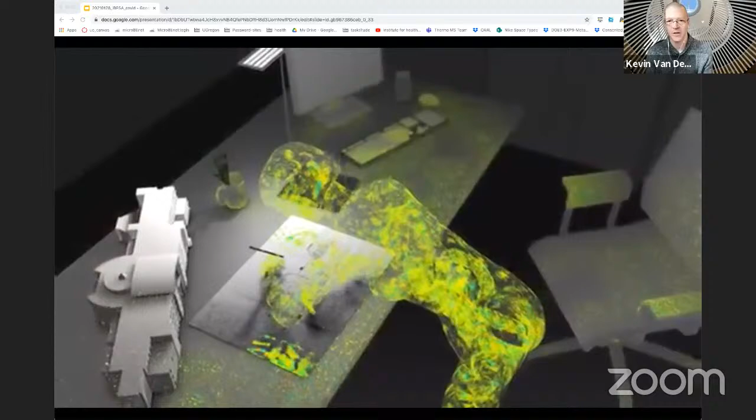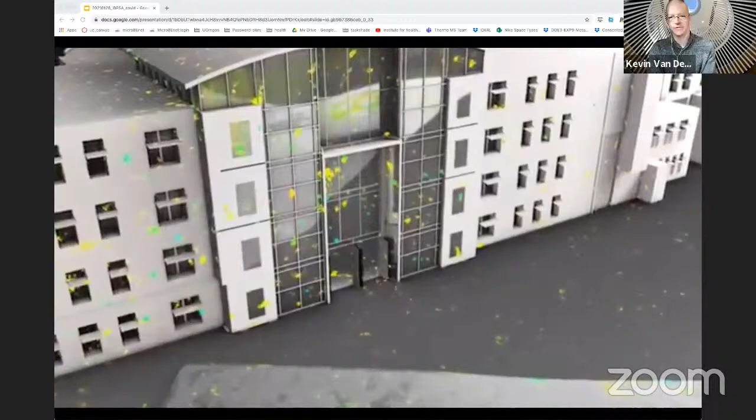Understanding indoor microbiomes opens an opportunity to better understand human health and look for this relationship between humans and microbes in the petri dish that we call buildings. This was true before COVID, and it's even more viscerally understood now in this COVID era. I hesitate to call it post-COVID because we're not there yet, and I don't know how soon we will be.

So that's some visualizations we put together about a decade ago, trying to understand how buildings and microbes work together. Since then, we've done a lot more foundational research to understand what's the microbial community structure in our buildings. What do we do as designers that implicate that microbial structure? What do we do as engineers and building operators that shift and shape the bacterial, fungal, or viral community structure? What can we do to modify it, to intervene either in design stages or in building operations?

What are the roles of some really key fundamental aspects of building operations, design, and sustainable building strategies, like the choice of materials, access to fresh air from natural ventilation or filtration and heat recovery? What about the role of light and daylight? What about UVC? All of these things. We've taken a lot of independent and discrete studies, and we're trying to aggregate them to better understand how you create a healthy building microbiome.

It's easy to say we want to get rid of the bad microbes, the bad actors. I think what's more challenging is to understand how do you cultivate a garden of healthy microbes that are supportive of health. I'm seeing the chat window, and I'm just going to ignore it unless, Nathaniel, you interrupt me and say somebody has a really burning question and it's relevant right now - answer it.

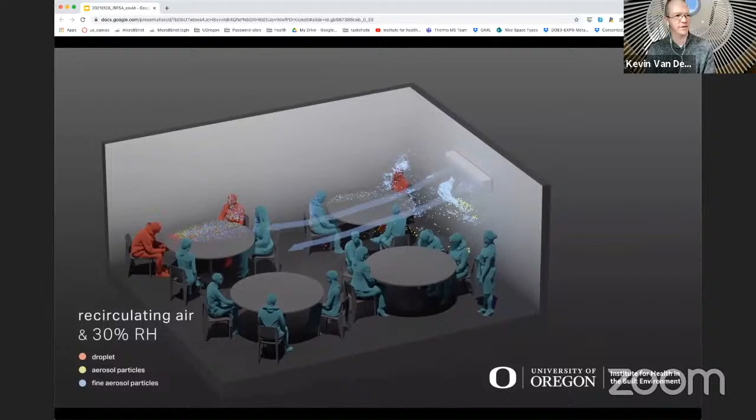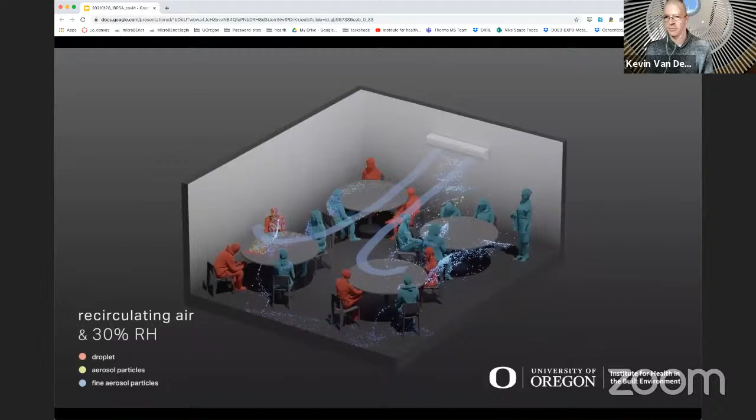Maybe you had seen this visualization of the Guangzhou, China restaurant. I'm showing it for a couple of reasons. One is because I think the general public didn't really believe or have a conception of how aerosols move around a space and how viral particles could be caught up in those aerosols. So it's based upon our previous sampling of microbes in buildings that we were able to put something like this together.

Then, well, what could operating a window and increasing outside air through natural ventilation do, and what could it do to mitigate risk? I think the other thing is that it introduced this idea that it's probably impossible to get to zero risk, and we need to start to conceive of what level of risk are we comfortable with.

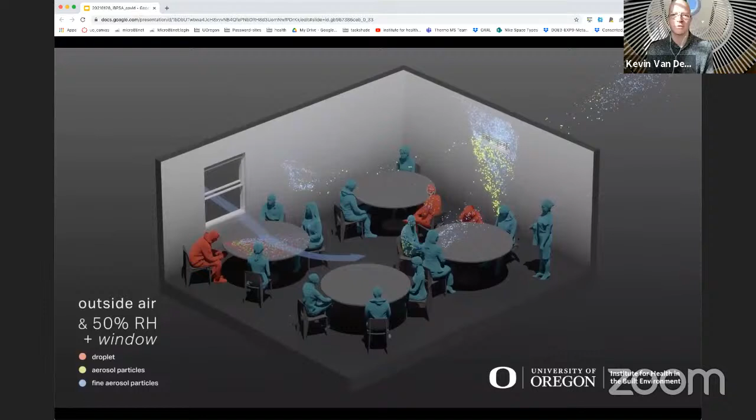And that's a hard one, right? Because especially early in the pandemic, but I would say even now, there's this expectation that unless it's zero risk, I'm not going back to the office, unless it's zero risk, we shouldn't be opening schools or whatever.

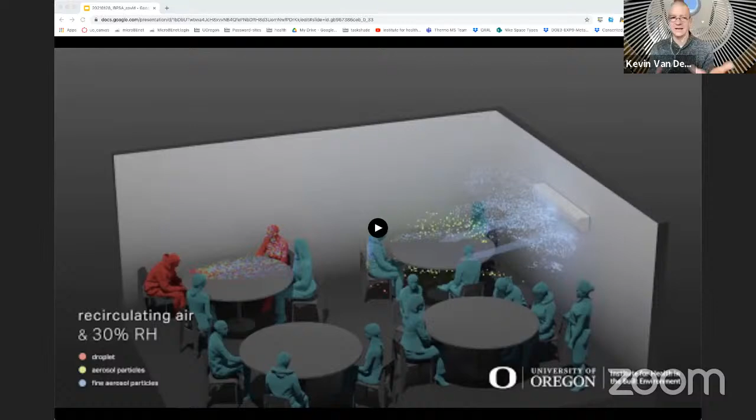But we know that grocery stores have been occupied, hospitals have been occupied, long-term care centers have been occupied. And yes, there have been outbreaks, but it's not every time, it's not always. So how can we start to understand what's a reasonable amount of risk? I'll cue that up for more topic conversation in a bit.

So we pivoted really quickly from talking about C. diff and MRSA and Pseudomonas aeruginosa or norovirus, and we pivoted to talking about SARS-CoV-2, or coronavirus. I just want to highlight Patrick and Leslie from the team who ended up doing a lot of the field work.

Here you can see them up at the hospital, in the wet lab, sampling in air handling systems. These folks are trained, about half that crew is trained in microbiology and the other half is trained in engineering or architecture or whatnot. So it's a really interesting team of people to work with.

And these are the tricks of our trade, this hybrid indoor microbiome work: surface swabs, glorified Q-tips, passive settling plates, otherwise known as Petri dishes, but we use them to catch dust that lands out of the air and lands on them, and then active air pumps.

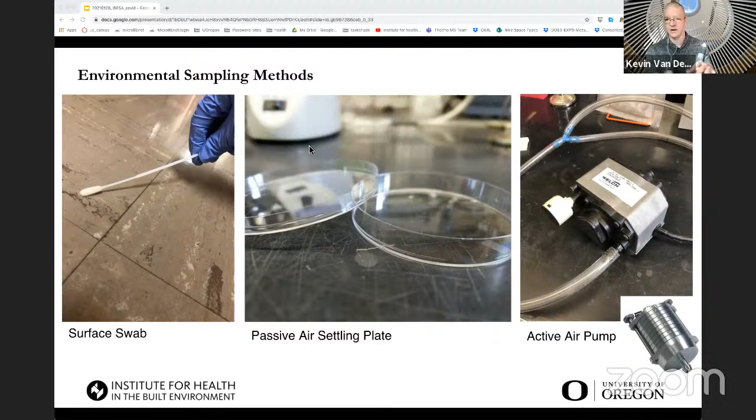So there's a fundamental difference between the heavier particles that fall out of the air and land in a Petri dish versus the ones that tend to stay in the air for hours—those sub-4-micron or sub-3-micron size particles that may stay in the air and float around in air streams, or even very still air, for hours. So we sample all three of those different ways.

We use a protocol really similar to what, by now, probably most of you have had for a COVID test, one way, shape, or form. It's a really similar protocol, just a different sample. So instead of sticking the swab up the nose, we're swabbing surfaces in a room, or grabbing active air samples. We're using reverse transcription and the polymerase chain reaction, or qRT-PCR, which is all the same exact stuff—WHO and CDC guidelines for those procedures.

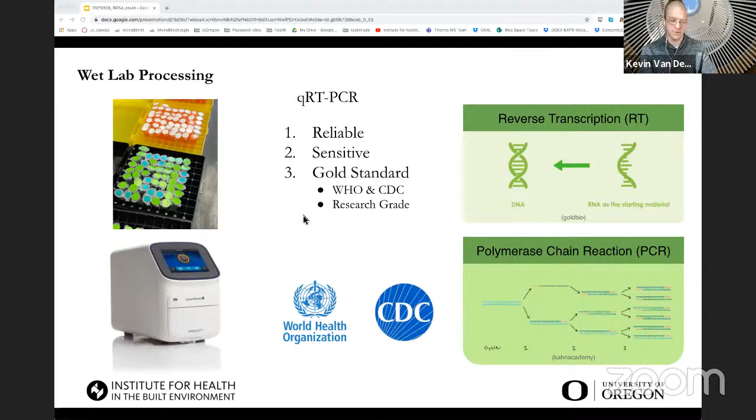It's really the gold standard for testing, and we're using a similar approach. Now there's a lot of argument that this is sort of overkill for human testing—maybe there are faster, easier lateral flow assays you can do instead. I'm not going to argue that there may be more efficient ways to do human testing, but for environmental testing, where you're dealing with at least an order of magnitude, if not multiple orders of magnitude, more dilute samples than when sampling right in someone's mouth or nose, the highly specific and highly sensitive methods are super useful. We can say with a great deal of confidence that we're measuring SARS-CoV-2, and we can measure down to just a few gene copies. So we started sampling in other places in the hospital, and then the OB doc said, hey, what about us?

The reason they said that is because they weren't getting access to the PPE yet. Anywhere from 0% to 15% of the moms, depending on the city and where we were in the surge of the various waves, were coming in with COVID, whether asymptomatic or symptomatic. Somewhere up to 15% of the population at different periods of time were coming in COVID positive.

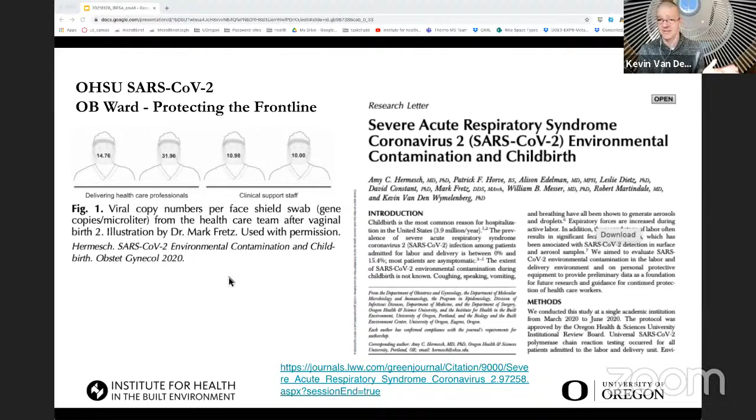So the OB docs delivering babies said, hey, these are aerosol generating procedures, let's study this. We took those tools into operating rooms with 20 air changes per hour, where they were doing C-sections, and patient rooms at 6 air changes per hour, where they were delivering vaginally. And we did sampling.

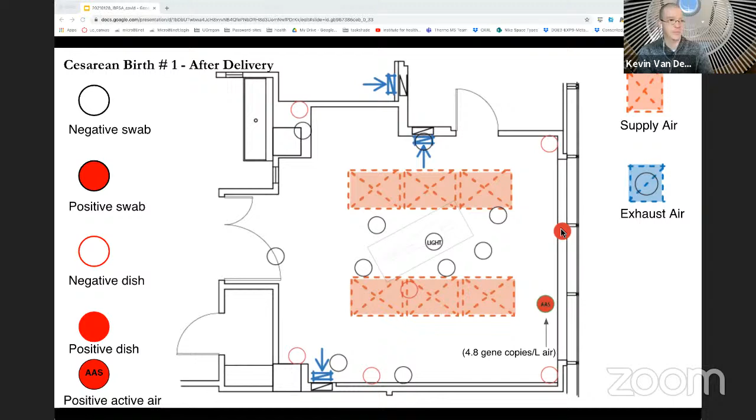It wasn't always the case, I will say. After the procedure with a COVID positive mom, we see there's a settling plate and an active air pump that turns positive. A lot of those surfaces remained clean though, pretty amazing. That's a lot of air change, and it's a room designed to minimize infection, right? It's a highly controlled environment.

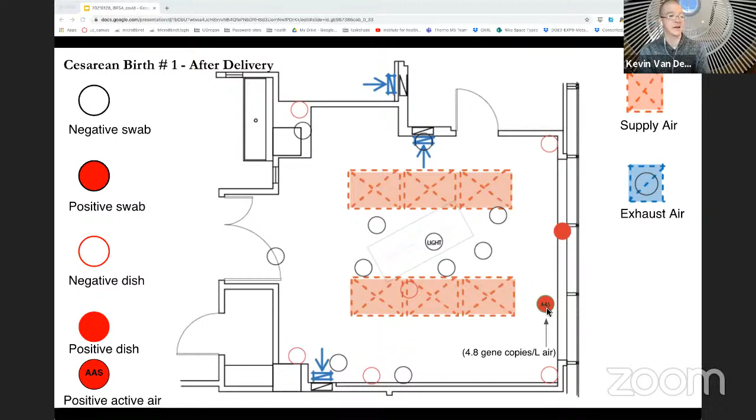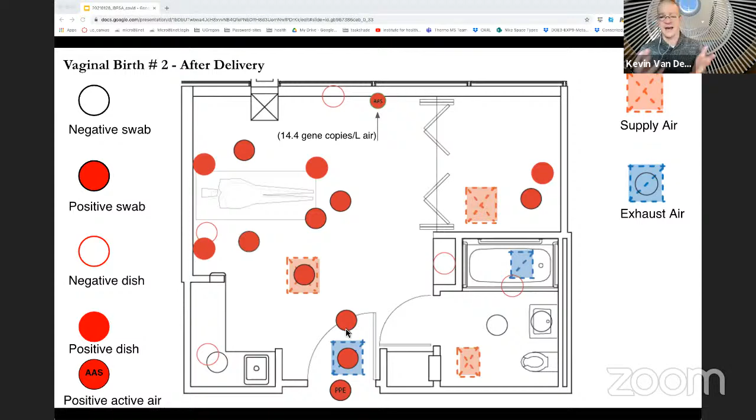This led us to ask the next question: what about air handlers? This is still a preprint - eventually it'll get through peer review, it's been sitting in peer review for 6 months, so it's still a preprint. But we went up the air handler and started looking at the different floors of the building, and what air handlers supply and return air from those floors.

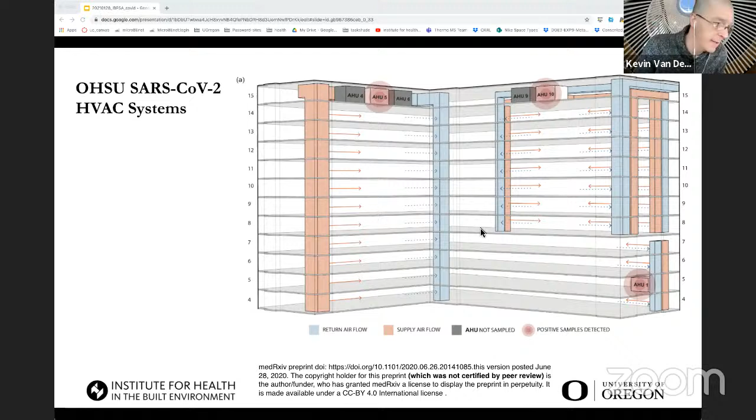This was done during a period when there was a lot of outside air because it was pretty mild. The building was able to operate in economizer mode here in Portland, Oregon, during most of this sampling. But we were still able to sample and detect SARS-CoV-2 at multiple locations within these room-sized air handlers.

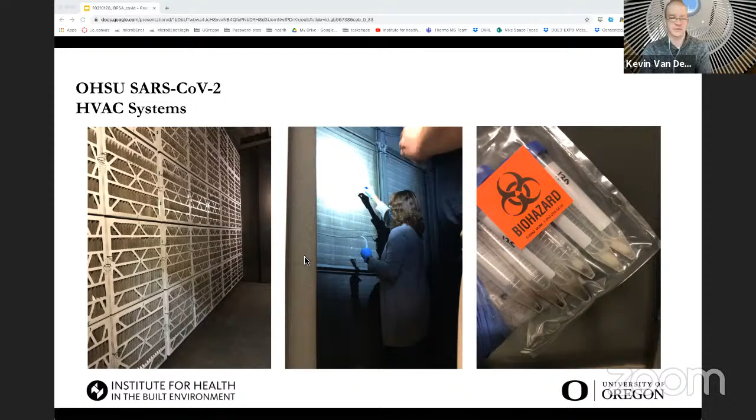There's Leslie sampling in one of them - you can just imagine Leslie standing in here sampling. There was the MERV 10 pre-filter, the MERV 15 final filter, and then just after the final filter, there's a series of regulating dampers, because this is a big hospital. Multiple air handlers are ganged up and they modulate how much total air is delivered by modulating how much comes from each air handler. But it gave us another point of impaction shortly after the final filter, before the air is delivered into the various rooms.

We sampled multiple locations from multiple air handlers - 3 locations from 3 air handlers. In every air handler, every single location had some positives. Not every single swab we took was positive, but every location had some positives for the presence of the virus.

Now, the big question - we got a lot of positive and negative publicity around this preprint, because MERV 15 is higher than what ASHRAE recommends, MERV 13, and we're showing that, well, look, some virus might make it through. So we were very, very careful to say that we don't know that the virus particles we sampled, or even the RNA we sampled and tested positive, suggests that it's a valid and viable virus, or that it's infectious. That takes a whole separate set of assays, more expense, more complication. We are continuing to go down that road, but I don't have results I can share today with you on that.

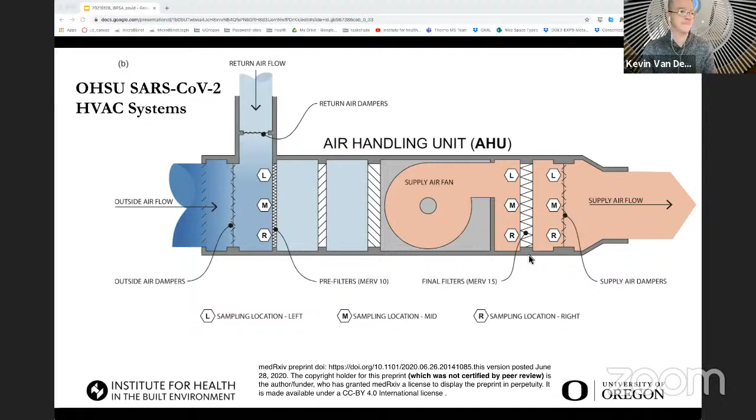Okay, so where are we headed? We're trying to bridge the gap between a fear-based approach to building mitigation and an evidence-based approach to building mitigation.

We're also trying to manage this in the context of two crises: the global pandemic and COVID, and global climate change, the climate crisis. So we have to figure out the both-and. We have to figure out a way to operate buildings that support human health while also managing energy.

A lot of the recommended practices just increase energy consumption. In particular, increasing outside air, either percentages or total air exchange rate with more outside air, can really increase fan energy and specifically heating and cooling energy associated with that. There's even some people calling into question the validity and raising concerns around viral transfer through heat exchangers. I'm not going to get into that, but let's just say energy efficiency is under attack.

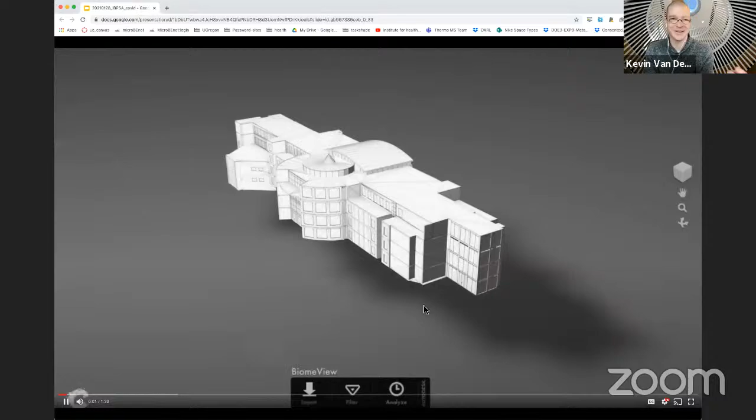All right, indoor air quality. So I've talked a bit about microbes in buildings already. This is from about a decade ago, and we were looking at bacterial community structures, not viruses, but there are some corollaries that we can draw here.

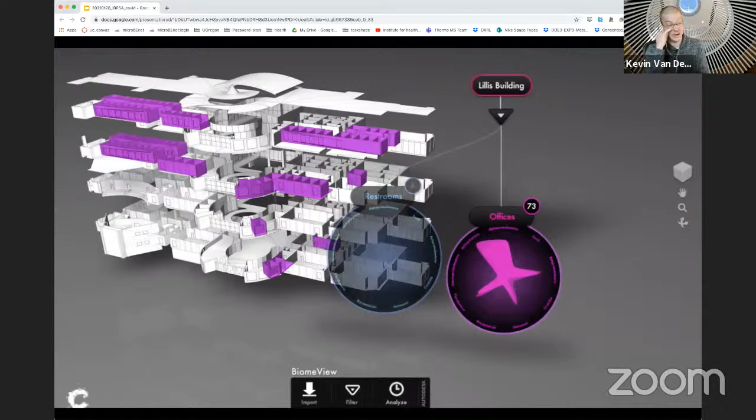We looked at this business complex, and we looked at offices, and this is a lobe plot of the different bacterial clades. If we zoom in, you can see that each office has an abundance of certain types of bacteria and a dearth of others, and that's a different signature than restrooms, and a different signature than classrooms, and that may be because of the activity, the materials, the presence of water, what you do in bathrooms versus what you do in offices.

And we saw that air handlers associated with these spaces also had different signatures. This was my clue to let's go chase COVID and air handlers.

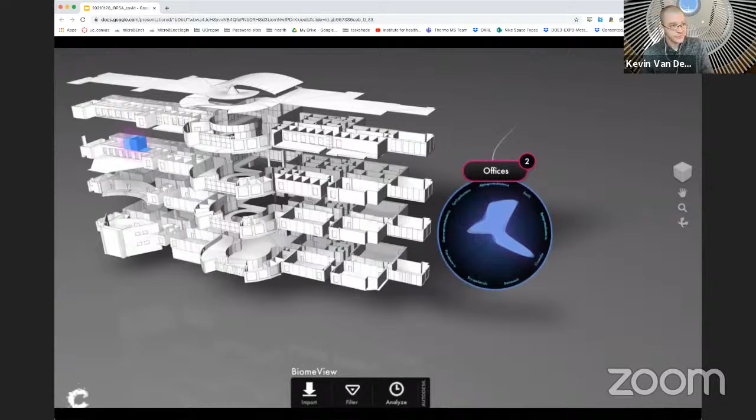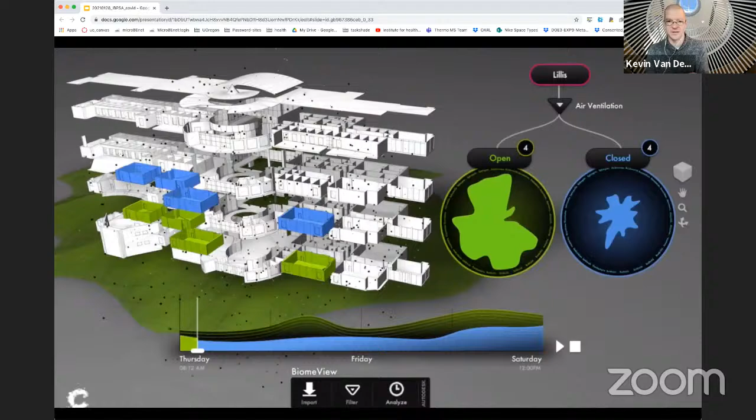We can see that offices closer to one another have different signatures than offices further away. We started to look at airflow patterns, and we noticed that offices or classrooms that were mechanically ventilated have a different signature than classrooms that were naturally ventilated. It's the same outside air, but it's getting filtered in one and recirculated in the other. And in the naturally ventilated one, it's more abundant because of night flush cooling. You're getting 20 air changes per hour, as opposed to a mechanical ventilation system where you're maybe getting 2 or 4 air changes per hour.

Then you look into the actual community structure and you see, wow, there are actually fewer human-associated bacteria in the spaces that are more abundantly naturally ventilated. Maybe that's about the solution to pollution being dilution, or maybe it's about seeding the indoor microbiome with more abundant, unfiltered outdoor microbes. That actually creates sort of a Darwinian competition associated with the food in that space.

And you don't create an environment where a nasty microbe can take hold and grow. Now, let's be clear, with COVID, we're not talking about microbes collecting on surfaces and growing so much as we're talking about time spent in a shared airspace and breathing other people's exhaled air.

But the way this does come together is that shared airspace will have more particles containing viable virions when you have lower airflow. So there are some overlaps. In a naturally ventilated space, chances are you have higher airflow rates, not always, and it's more variable and less controlled.

So I get it, and believe me, I've had arguments with lots of engineers about, well, there's a chance that the microbe's going to fly out one window and swim in another. And guess what, you want to find a paper? There are papers out there that will show this is possible, especially for SARS-1.

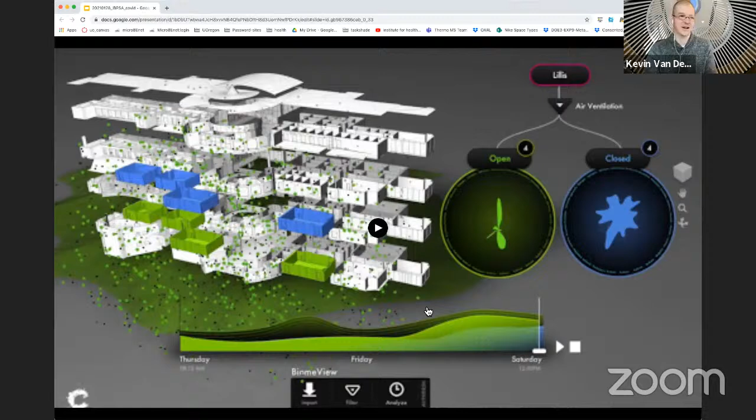So, okay, well what about controlled systems? Maybe there are some mechanical systems we can really be thinking about to find the both-and. Notwithstanding some concerns around viral transfer through certain types of heat exchangers, I would still argue it's probably pretty minimal. The viral transfer from a heat exchanger compared to the viral transfer from recirculated air is orders of magnitude different. So unless you're in a 100% outside air scenario, it's hard to argue that heat exchanger transfer is going to be the cause for concern compared to the recirculated transfer that most buildings experience.

What I like about it is it also pairs the idea of heat recovery ventilation with distributed ventilation. What I think is intriguing about distributed ventilation is, when we're dealing with large central systems, there's just a greater likelihood that you're going to be mixing air between spaces that may have had a COVID positive individual in it. Now, there's a huge dilution profile associated with any of that recirculated air. And by now, a year in, I think if this was a major concern for outbreaks, we would have heard more stories about it.

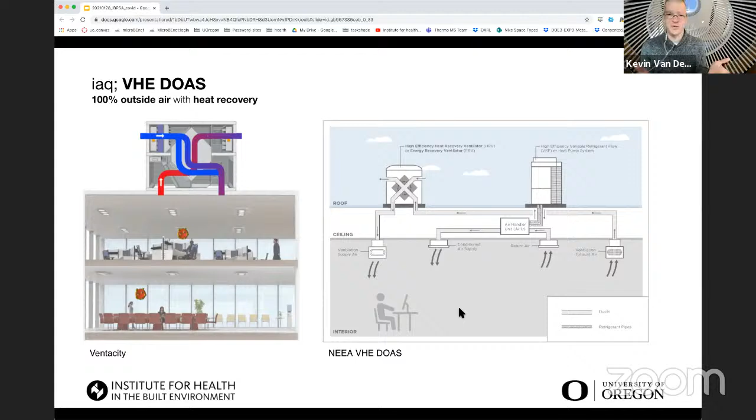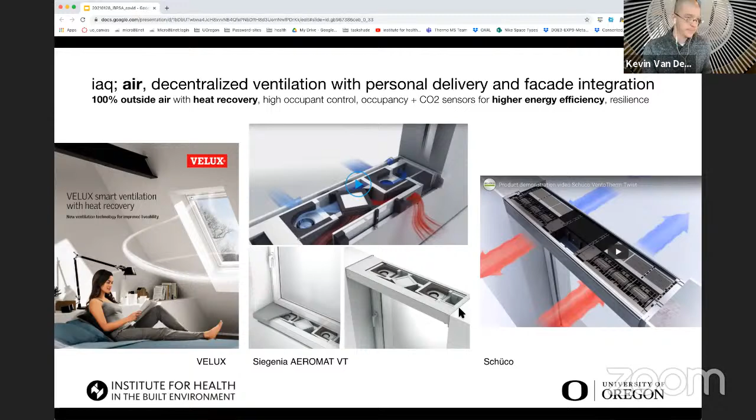All right, converging crises. We're also dealing with wildfire smoke here in Oregon. We had to shut down because of COVID. We had to shut down because of wildfire. I built my first homemade filter fan, taking a box and grabbing some MERV 11 or MERV 13 filters from Home Depot and taping them to a box fan, trying to find solutions because I couldn't buy HEPA between COVID and wildfire smoke. I couldn't buy HEPA for the house. Eventually they came about two months later. But find creative solutions for both, and I think this one's crazy, but maybe there's a pathway forward.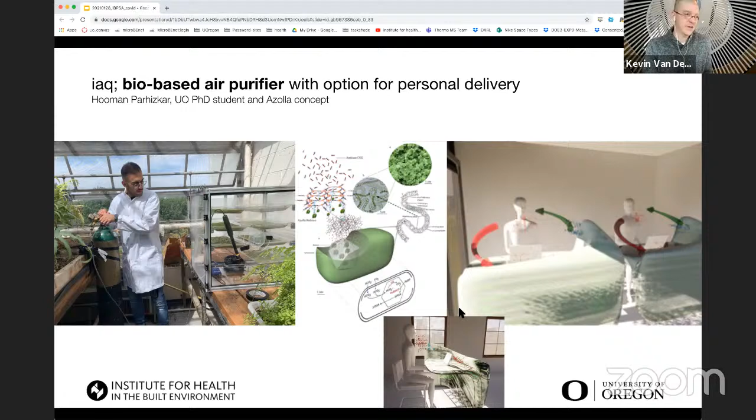Then you pair that idea with like a micro breathing zone. Could you create smaller shared airspaces that have some amount of oxygen generation when you don't have safe air outside and you don't have safe air inside because of COVID? So those are the kind of things we're thinking about.

I'm going to do a real quick litany here and then open it for questions. The controls piece will be brief, but we're trying to quantify this. This is a free resource called safeairspaces.com. It's trying to put some numbers to the risk profiles associated with different types of indoor spaces. So I'm just going to mention that and let you go look for it yourself.

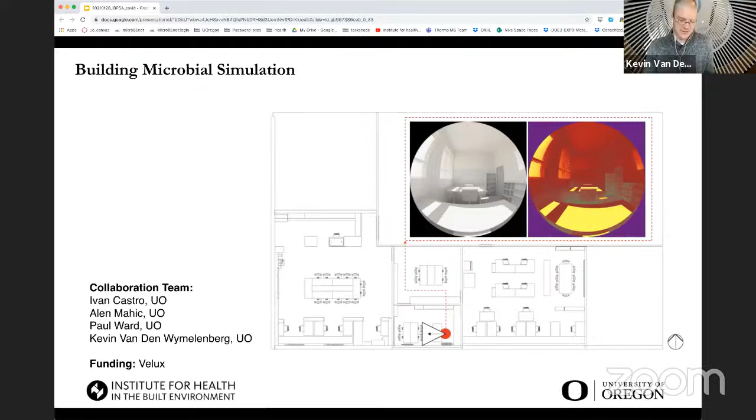I want to mention one other piece of research we're working on, where we're looking at the surface inactivation effects associated with ultraviolet light. So far we're conceiving of this as an open window, where the full dose of outdoor illumination comes in like a stream of sun through an open window. Then we're going to layer in the UV filtering effects of glass and look at the results. What's kind of cool—UVA and B on the left, UVA only on the right—minute-by-minute Radiance simulations paired with the UV inactivation curves published for SARS-CoV-2 shows that it's not zero.

So this is my connection back to simulation. Can we predict how fast, with a certain daylighting strategy, we can inactivate any SARS-CoV-2 that might have landed on a surface? You can see on the order of minutes we can inactivate it with both UVA and UVB. And likely over the course of a day, even with UV filtering glass, we can see some implications.

So finally, control. How do we bring this to control? How do we make more use of data so that we can support healthy building operations? We all know there's a lot of data streams, data overload. We can't use them all. It takes a lot of work to try to use them all. And I am going to talk about adding data streams.

But I think the first thing I want to emphasize is we've been operating our buildings out of fear of an outbreak, throwing every strategy we can at the building to try to make it safe. So we're increasing outside air, increasing air exchange rate, increasing filtration, buying technologies and duct blasting with ultraviolet irradiation. We're contemplating various ionization techniques, needlepoint, bipolar ionization, or whatever. We're doing huge amounts of surface disinfection.

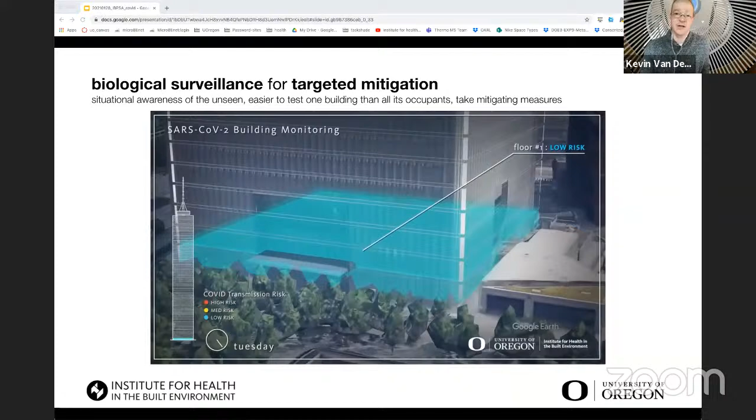But I'll argue that right now we could add a data stream about the presence of the virus in our buildings. There are a lot of companies out there doing it, providing that as a service. And we are doing it as a research team. So can we bring some evidence to guide building operation?

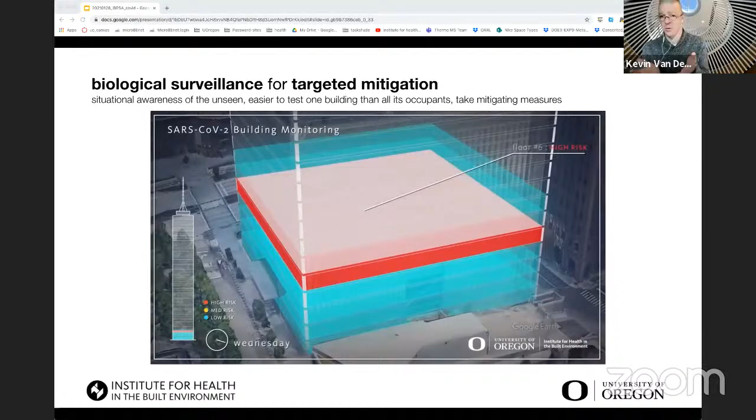Could we make choices about outside air, or about occupancy, about occupant density, about spatial contact tracing, as opposed to app-based human contact tracing, which they do in Korea, but we don't want to do here from a privacy perspective? Could we do spatial contact tracing and say that space had an exposure on June 29th at 2 p.m., and therefore these are the people associated with that space. Those people may want to quarantine. Those people may want to get a test, whatever.

Let's deploy enhanced filtration, even if it's just deployable HEPA filters in the rooms for those spaces. And let's target our solutions and strategies based upon some evidence and some information.

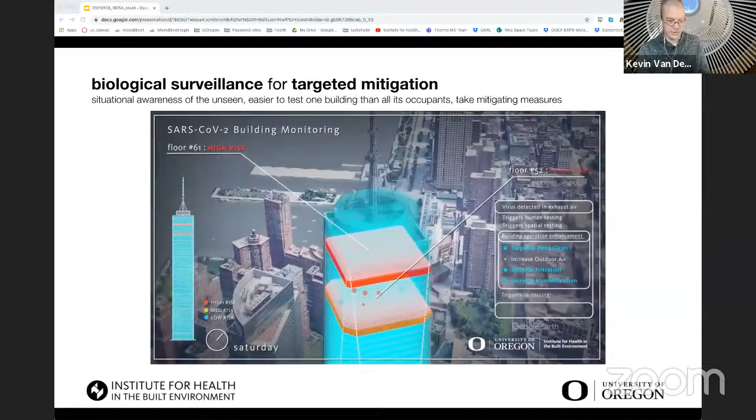So that's the conception we tried to put together here. It was a theory, and then we had the pleasure of collaborating with some folks to try it out in reality. We've heard a lot about outbreaks, and we think an outbreak is like the Guangzhou restaurant where they sit and have lunch for an hour and 15 minutes and 9 people get sick.

And that happens. The South Korean restaurant where they had 5 minutes of overlap and there was an outbreak, that happens. But so do the slow burn outbreaks. I think probably the slow burn outbreaks are the ones you don't hear as much about, because they don't become so pointed and evident that it was a specific event that resulted in an outbreak.

So we see this slow burn outbreak like the South Korea call center from early in March. They did their contact tracing, and we learned that before they shut the building down on March 9th, there was about 3 weeks of time where there were people in that building who had the virus.

What I'm trying to argue here is we could get a head start, perhaps with a viral monitoring program right now that does a 24-hour turnaround before you get results. But in the future it could be real time. We're actually working with some companies that are building real time types of technologies.

Perhaps you could get even faster and prevent these outbreaks from happening, detecting one person by sampling the HVAC return air or exhaust air. I don't think it'll be perfect. I don't think this is about getting to zero risk, but I do think it's about finding a way to occupy buildings again.

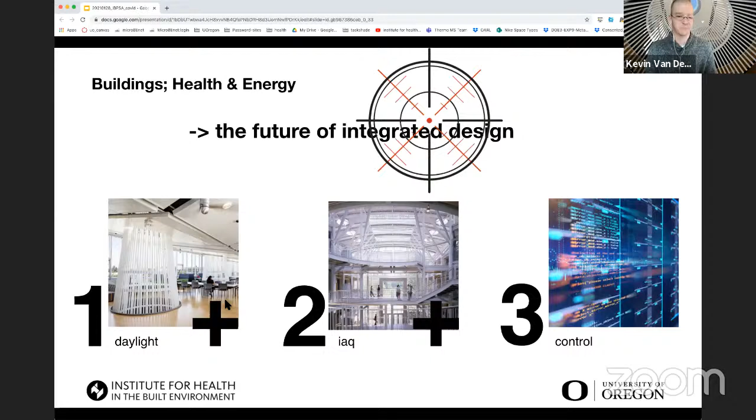Okay, so with all of that said, I just wanted to say I think the future of healthy buildings is a combination of daylight, improved indoor air quality, and bringing data to it, integrating data together through smart controls. So with that, I'll pause and go to questions.